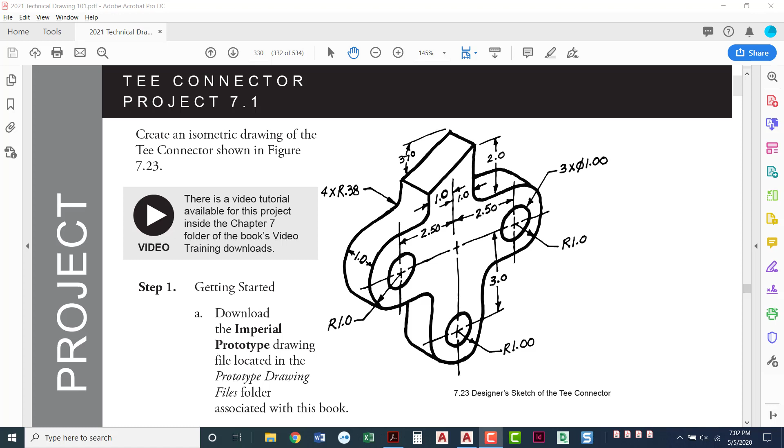In this video, I'm going to show you how to do the T-connector. This is Chapter 7, Project 7.1, where we're learning how to do isometric drawings. I've pulled up the picture from your book. As you can see, the T-connector is shaped like a T, so we'll start off with that T shape. We have a lot of dimensions here, and we'll slowly build this up using isometric drawing.

So things to remember as we're doing isometrics: when we put ourselves into isometric mode, it's important that we leave our ortho on. Ortho is F8 on your keyboard, so we can be sure we're drawing at 30-degree and 90-degree angles. We'll use the ellipse command, but instead of just the ellipse, we'll use the iso circle option, so remember to set it in the ellipse command. Certain commands don't work in isometric - fillet doesn't work the way it should, offset doesn't work the way it should, and chamfer doesn't work the way it should. So those are three commands we can't use in isometric, and I'll show you how to work around that.

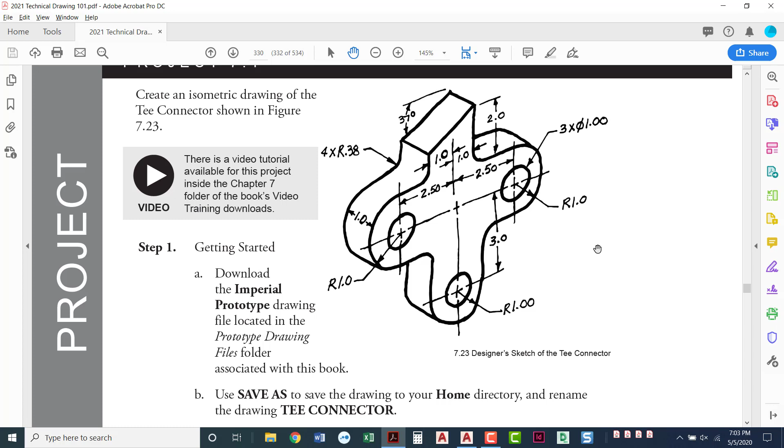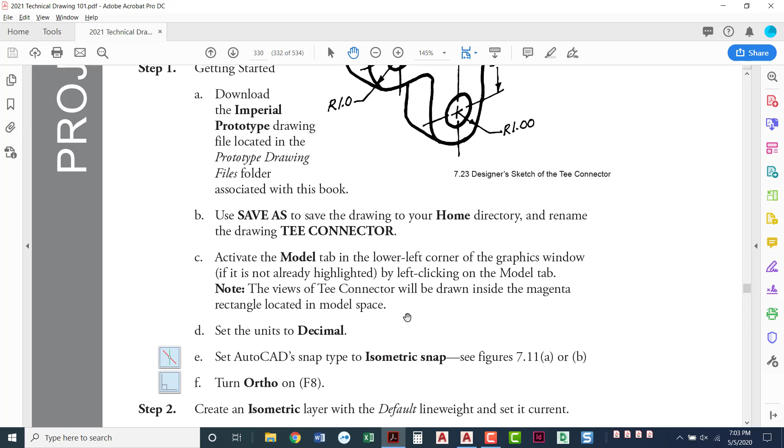So getting started, we're going to open up the Imperial prototype file. I've already got that one open. We're going to save it into our home directory as the T connector. I'll come over here to the drawing file and say Save As. We'll put it on the desktop and call it the T connector.

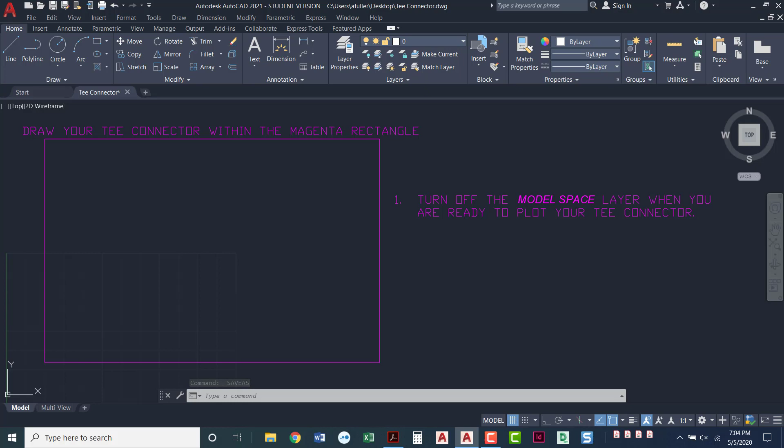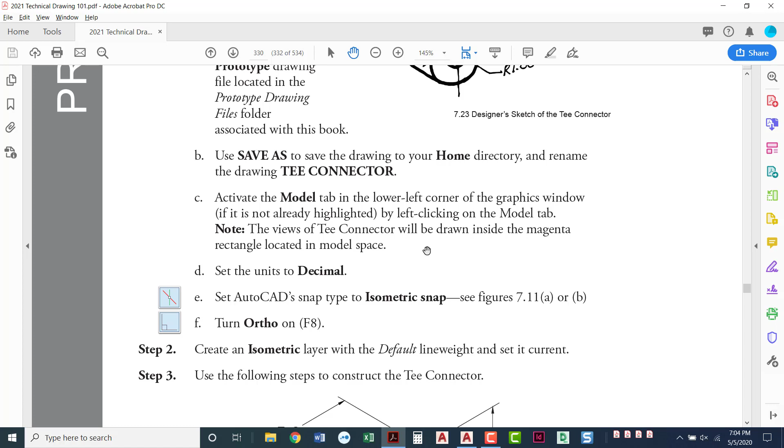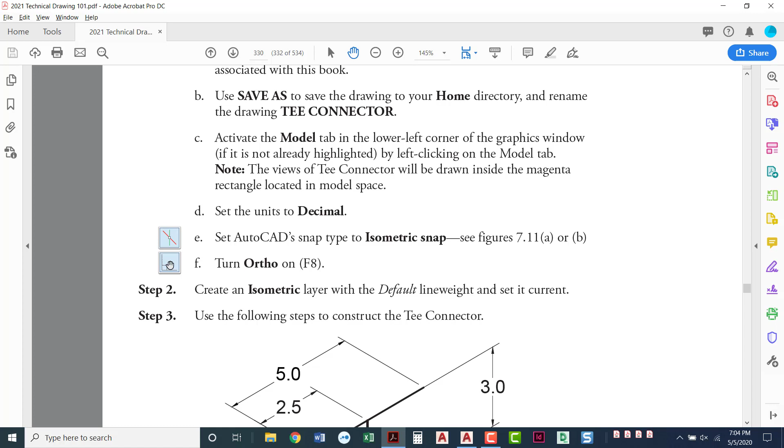So draw the T connector within the magenta rectangle. We'll come back here and look at what our other steps are. Activate the model tab - the model tab is where that black space is, our drawing space, the graphics window. We're going to set the units to decimal, and then set AutoCAD's snap type to isometric snap - there's a picture of an icon for that. We're going to turn on our ortho, here's a picture of that, that's F8, and we're going to get started creating the isometric.

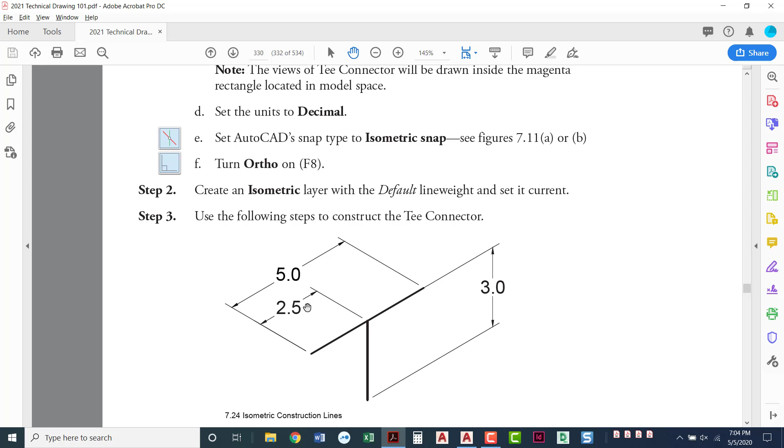I'll keep flipping back and forth to this book so you can see the steps we need to do. So we'll go in and set the units to decimal, turn on our isometric snap, turn on our ortho, and then get started. I'm going to draw that T shape - the overall shape has a length of 5 horizontally, and vertically it has a length of 3. So I'll come back into AutoCAD and we'll get started.

When you're doing isometrics, I like to turn that grid off because the minute we put ourselves into an isometric view, that grid is going to get a little wonky. I'll leave it on just to show you what happens. To put ourselves in the isometric view, the easiest way - and this showed up a few releases ago - we have an option down here to put ourselves into an isometric view. When we do that, it's important to note, look at my crosshair right now.

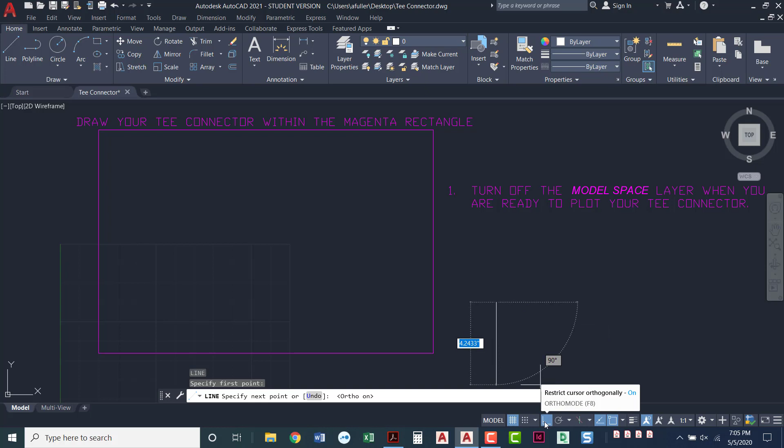So when I draw a line and turn on my ortho - I'll hit F8, or you could hit this button right here - it locks you into horizontal and vertical lines. You can't even make an angled line if you tried, unless you typed in a specific angle. Just using direct entry, I cannot get an angled line. So it's easy to think of ortho as locking you into just horizontal and vertical lines, but actually what ortho is doing is locking you into what your crosshair looks like.

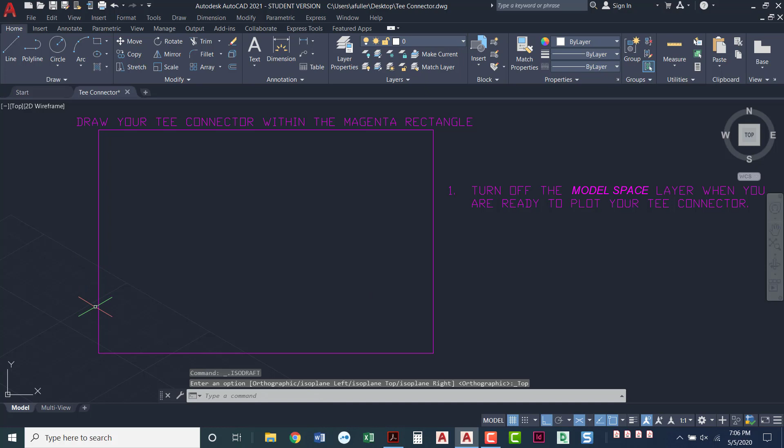So in doing this, we're going to change our crosshair to isometric. Right now it doesn't matter which one of these you choose, we're just going to click one. Now look, there's where I was saying my grid was going to get crazy - it went at an angle, so I'm just going to turn that grid off. It's not very useful when you're in isometric mode. But now that I've got my crosshair looking this way and I draw a line, I'm locked into these two angles that I see. I cannot make a vertical line even if I tried.

If I hit F5, that toggles between the different isometric cursors that I have. I cannot make a line going up at that 150 degrees. If I hit F5 one more time, now I can go vertically this way, but I can't make a line over here at 30 degrees. So that F5 you can use in the middle of a command - you can always hit F5 and just toggle between the different isometric views. There are 3 different ones, so you've got it this way, and this way.

So maybe it's easier to see it there. So F5.

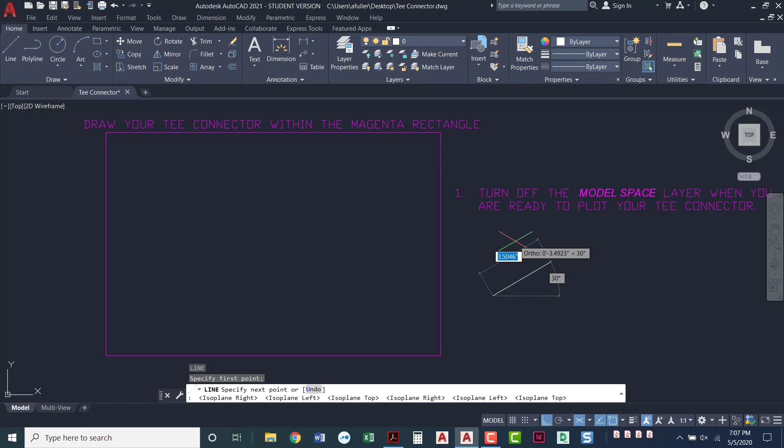F5, and F5, and you can just keep toggling between those three. So now that we know about this, we're going to go ahead and start our drawing. I'm going to draw a line, clicking somewhere in the middle. We don't have a specific start point for this one, but we'll click somewhere in the middle, and we're going to draw it out a distance of 5.

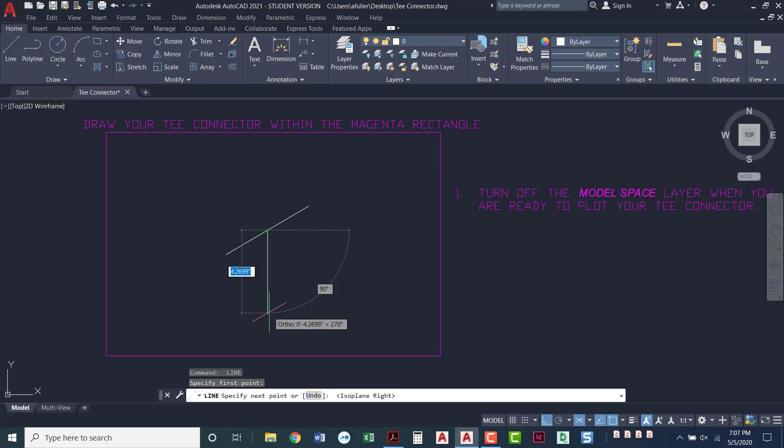We're going to draw another line, taking it from the midpoint, and we need to bring it straight down. I'm going to hit F5 again, pull my line down, and it tells me my distance is 3. So press enter—I've got the T for my tee connector. All right, let's go back in here and see we've got this drawn.

Scroll down, and now we need to do our ISO circles. And those ISO circles, they're a little bit tricky—you have to remember how to draw them.

It's going to ask you, potentially could ask you for a radius—it probably is going to ask us for a radius, and we're going to have to tell it needs to be a diameter. So we need to make sure we have one of them that's a 1-inch diameter. The second one has a 2-inch diameter. They're concentric, which means they share the same center point.

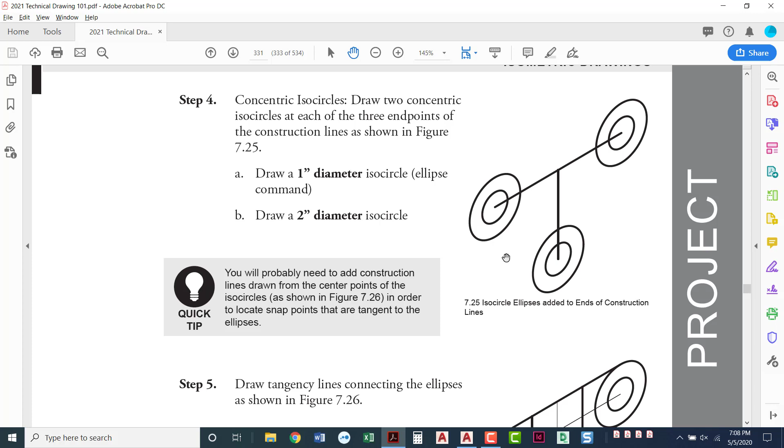So we're going to do them at the endpoints of all of those lines, those 3 lines of the T. So the 3 endpoints that we have: 1-inch diameter, 2-inch diameter. Let's come back to the drawing.

We're going to do our ellipse command, and actually for that ellipse, we're going to pull this down. Instead of doing the center option, we're going to choose the axis end option. It won't work with the center option.

But if you look down here at the command line, we now have an option for ISO circle. So you can type in I for ISO circle. You can move down here and click on the word ISO circle, or you can do your down arrow and keep toggling till you see ISO circle and press enter.

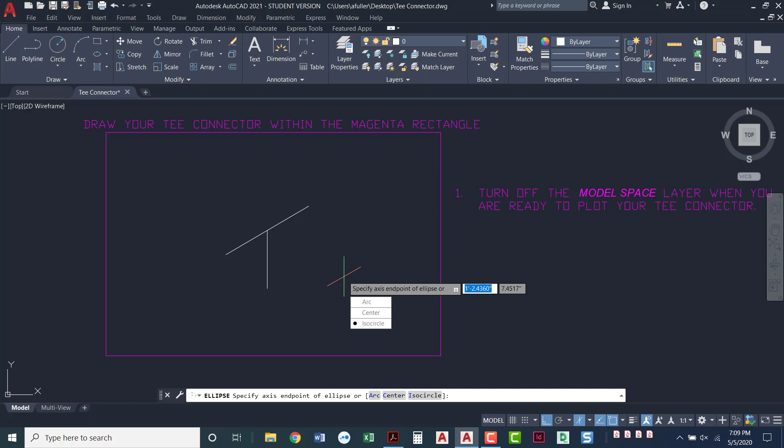Typically, I just do the I, enter. It's the easiest way to do it, I think. So we're going to do an ISO circle.

And you'll know that you did it correctly when you click here to start, and it kind of functions like the circle command instead of the arc command or ellipse command.

So we're going to do that ISO circle, and watch—I just want to show you when I press F5 right now, that will toggle between ISO top, ISO right, and ISO left. So you're going to figure out which one looks the best. It's ISO right that we're going for.

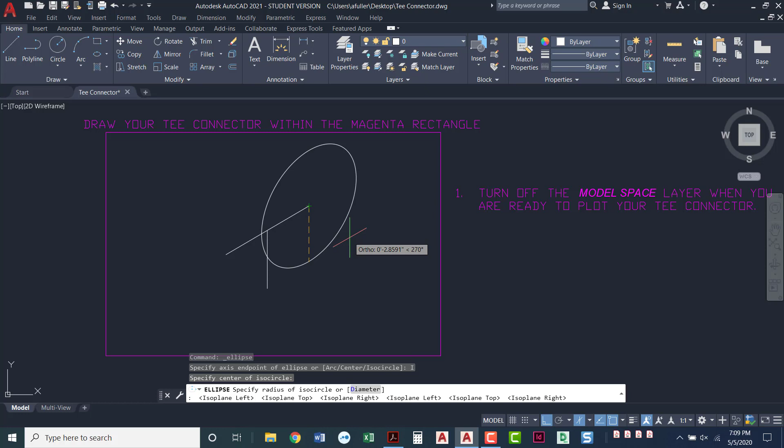So now I've got this. But this is where, look down at the command line, it's telling me to give it a radius of the ISO circle. But if you remember, we were not given the radius, we were given the diameter. So it's important to remember right here, we're going to have to press D for diameter, press enter, and now it's prompting me for the diameter.

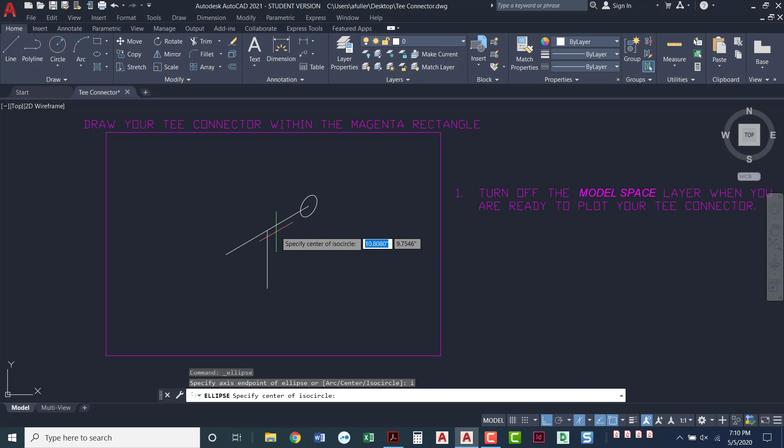So the first one, I'm going to type in a diameter of 1. Press enter after you've typed in your diameter. I'm going to start that command again—I need to tell it to be an ISO circle, so I for ISO circle, enter. I'm going to click on that same endpoint.

It's asking me for a radius again, so I need to force it to be a diameter—D, enter. And this one's going to have a diameter of 2. If you accidentally just typed 1 and 2 without forcing it to ask you for a diameter, you have just made your circles 2 times too big. So look at your drawing and make sure that you don't have giant circles.

Yours should look like mine.

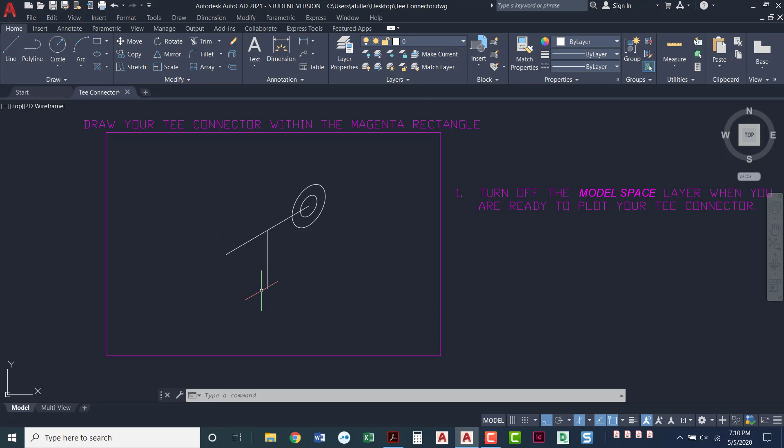Now what we're going to do is we could continue and just draw 2 ISO circles here, but since they're all the same size, let's just go ahead and do the copy command. It's always better to use the tools that we've got. I'll copy it from the endpoint to this endpoint to this endpoint. The endpoint that I originally picked it up at is also the center of those 2 circles, so the center should already be at the endpoint. It really doesn't matter which base point you pick, the center of the circles or the endpoint of the line - either way, it's the same place, but you're going to snap to endpoint and endpoint to get your lines looking the way you need them.

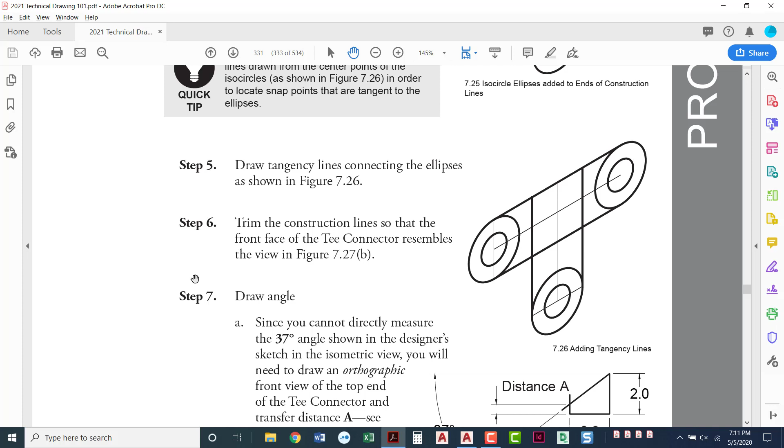All right, so we've done step 4. We're going to come down here to step number 5. We're going to actually draw these lines out to figure out how to get this done. So I'm going to come over here.

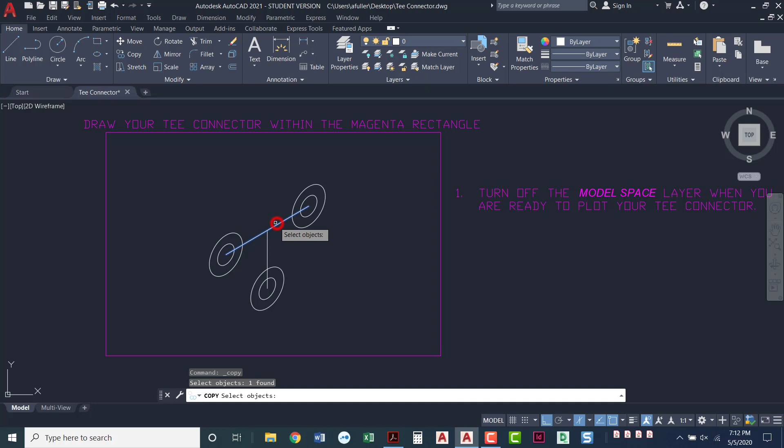Normally this would be a great time to use the offset command, but offset won't work for us. So the way that I do this is I do the copy command. You can copy and just pull it in the direction you want to go, and type in your distance. So copy, select this, press enter, select the base point, and pull it - make sure your ortho is on. You have to have your ortho on when you're doing isometrics.

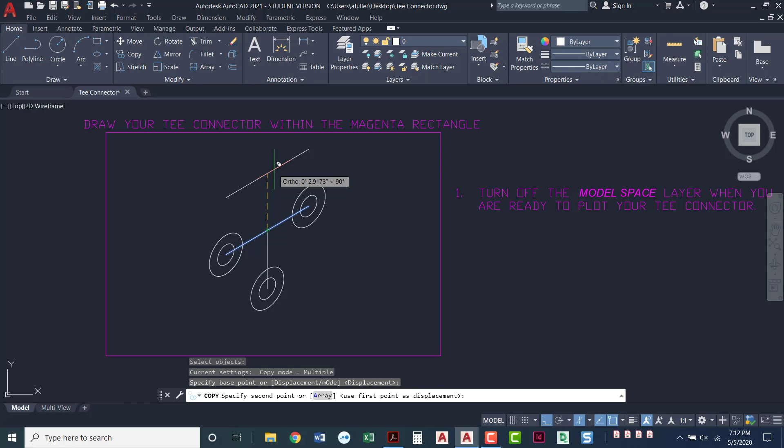If our biggest diameter was a diameter of 2, that means it has a radius of 1, so to get from the center to the very top is going to be a distance of 1. I'm going to pull it up. I like to over-exaggerate how far I pull it up, that way it doesn't get overridden by O-snap. Sometimes that happens and it'll snap back to something I didn't want. So I always exaggerate how far I pull it up just to make sure no O-snaps are going to catch me. I'm going to pull it up and type in a distance of 1.

I'm going to pull it down, and again over-exaggerating, I don't want any of these O-snaps to get me, so I'll pull it down, over-exaggerate how far, and type in your distance of 1. You're not clicking anywhere, I'm just typing my distance. Press Enter, then press Enter one more time to end that command, and I've just copied this line up and down so it's tangent to those points.

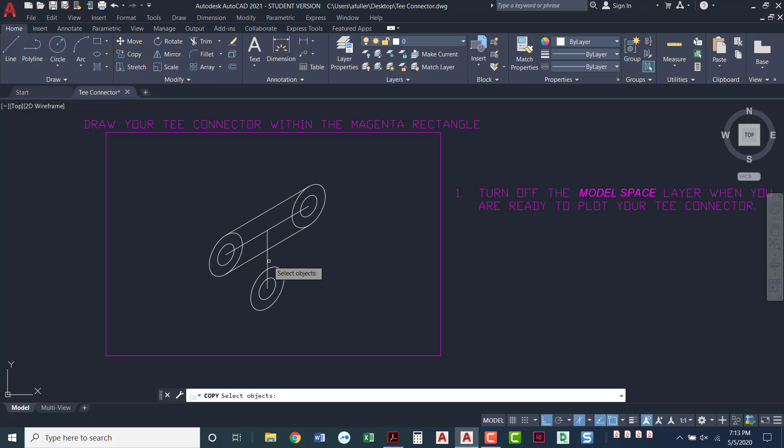I'm going to do one more copy command. I'll take this line, select it, press Enter, select a base point, and again I'm going to exaggerate how far I go out, a distance of 1, press Enter to end the command. Now I have that T in the middle, which was just a guide to get me to the center of those circles and help me get the copies to get the edges, so I'm going to erase that T.

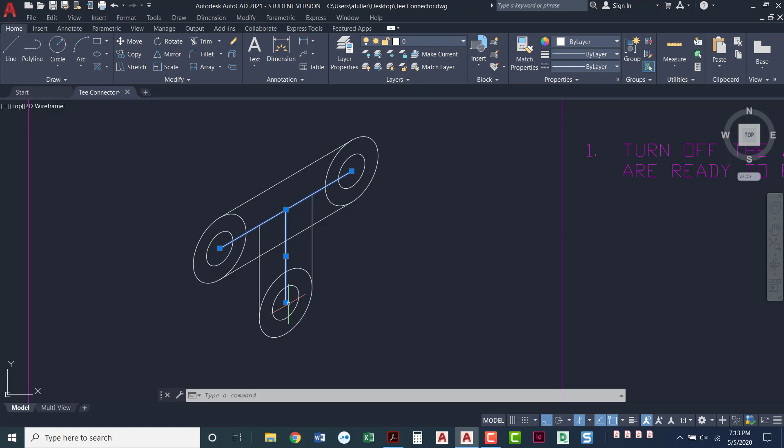I'm going to use my extend command - extend is kind of buried in with that trim. I'll press Enter so it extends to the next thing that it sees, and just click here, click here, and it extends right up. Now I've got this shape.

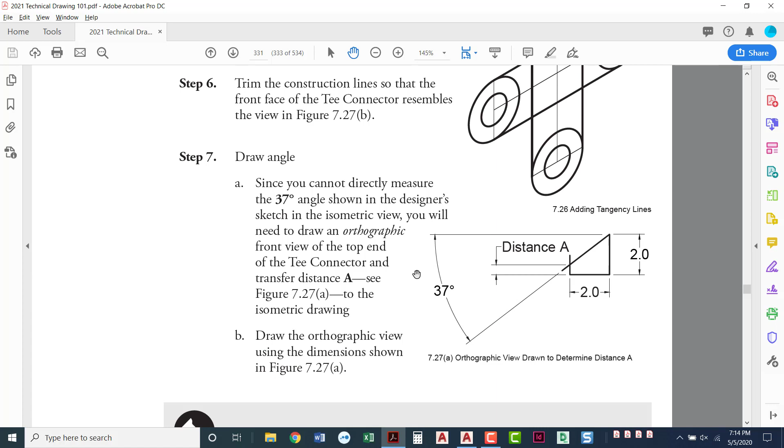Now what I need to do - this is the tricky part. I've got this guy right here, and the tricky part is now I've got this angle at the top. But we can't draw angles when we are in isometric, because with isometric we're already at an angle. So drawing 37 degrees when we're already at 30 degrees is going to make it all wonky. So what we're going to have to do is take this distance - we know this is 2 over, we know this is 2 up, we know it's 37 degrees down, so you could do some math and know that this is 180 degrees plus 37 degrees.

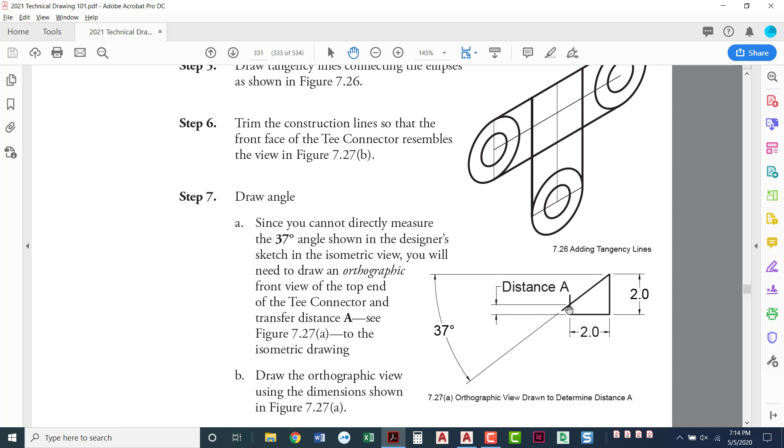So that would be 180 would be 190, 200, 210, 217 would be the angle here. Or we can just go up and over, and then we'll figure out how to draw that line. What we're trying to get is this line, this distance right here, this tiny little guy right here. And so we're going to go back into AutoCAD.

I need to do this, but I can't do it in isometric, so I'm going to have to put myself back into my regular cursor, which would be rectangular snap. I'm going to click on that button to turn it off, and now I'm out of isometric mode and back into my rectangular snap. I'm going to draw a line off to the side over here. We're going to go over a distance of 2, up a distance of 2. We can come down, and if we know what that distance is, we can come down that distance. I'm going to turn off my ortho, press F8.

So if I come down this way, I can take my 180 plus my 37 degrees, which would be 217. I'm going to make sure when I'm doing this, that when you draw angles in AutoCAD, it looks at kind of where you're starting from, and it imagines there's a horizon here. So if you want your angle to go up, you're going to go up. If you want your angle to go down, you're going to go down. It's a little bit tricky, but actually, if I'm going to say 217, I'm actually going to keep it up here.

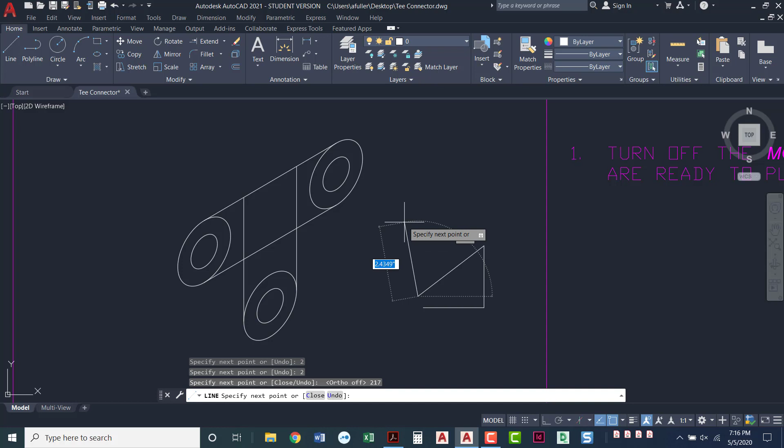To make my angle go all the way from 0 down to 217, any length of line will work. I'm just going to press Tab and type 217. And it just went down 217. If I had started down here, it would have done 217 from 0 and gone back up this way, counterclockwise.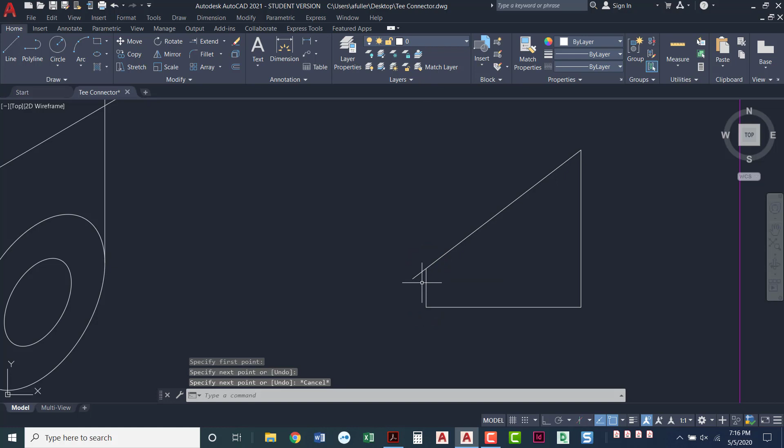Oh, I'm sorry, clockwise. So now that we have this angle, I'm going to come in here and draw a line. I have no idea what length that line is. I'm going to trim right there. And so this is how I would have drawn this if I were drawing just the front view of this Tee connector. What I'm actually going to do now, it's a little bit tricky, but it's cool.

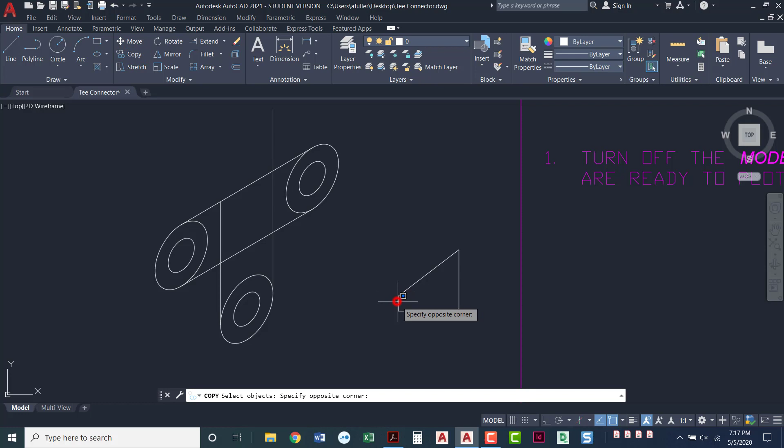Watch. I'm going to copy this to here because I know that's a length of 2. I'm going to copy this, whatever length that is, I don't even know, to here. Now I'm just going to draw a line, connect the dots, from endpoint to endpoint.

Do you see how skewed that is? This is what I was talking about. You can't draw an angle when you're in isometric because you're already at an angle. So the whole thing is kind of skewed.

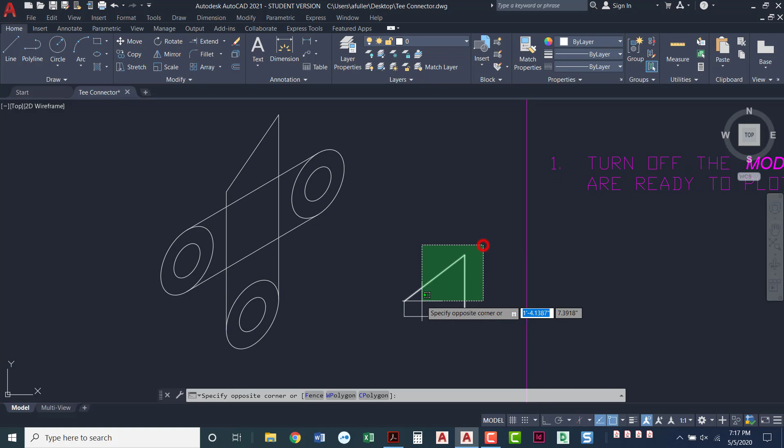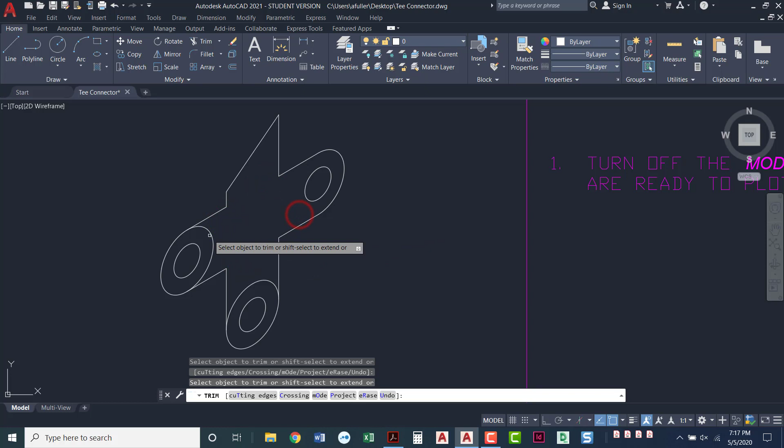Now that we have that, we don't need this guy anymore. I'm going to go over here and now trim. Using the trim command, it's buried in my extend. So trim, I'm going to press enter. I'm going to trim out all of these lines, trim the insides of these arcs as well. That looks amazing. Look at that. Looking good, looking good. All right.

So I'm done with this guy. The next step, oh, it just showed me, that's step 8, we did that. The next step is, I've got the guy looking like this, trim out any lines, we did. The next step is, I need to get fillets in here, but remember the fillet command does not work when I'm using isometric. So what I'm going to have to do is use the copy command.

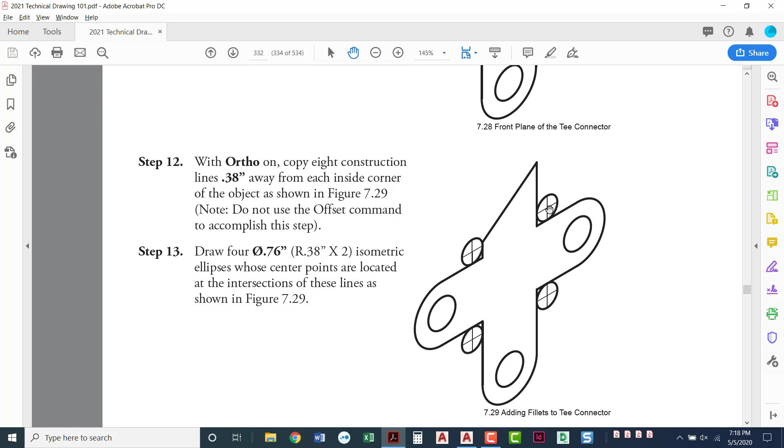I'm going to take this line, copy it over. We have a radius of 0.38, so that means to get to the center of that arc, I'm going to copy over 0.38 and down and up 0.38. I'm going to copy all of these lines over 0.38, and then I'm going to have to draw iso circles.

So I'm going to do the copy command. May as well just pick up these 2 lines while we're at it. Pressed enter when I was done. Oops, you know what I have not done? I have not put myself back into an isometric mode. I'm going to click that button, and I'm also going to click the button to put myself into ortho.

Got to make sure you've got ortho on and your isometric on. So now I can do it. Copy, click those 2, press enter. Select a base point. It doesn't matter where your base point is. I'm not even going to be on the line. I'll just touch out in here in space. Remember I talked about exaggerating how far you bring it out just so O-snaps don't get you.

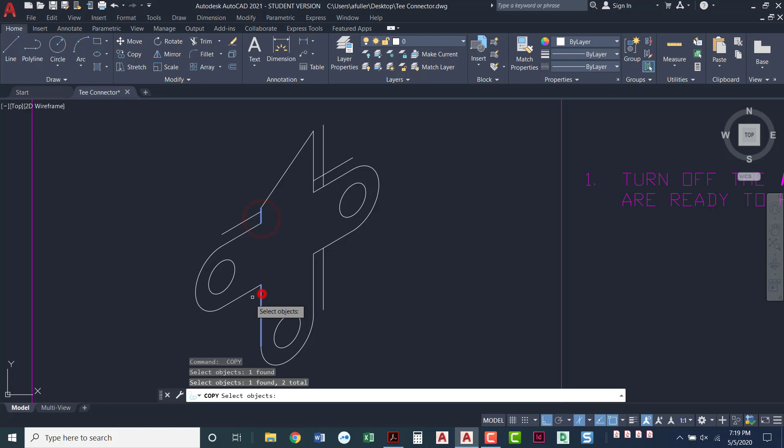I'm going to type in 0.38. Press enter to end that command. I'm going to select these 2 lines, just saving myself some time so I don't have to do it so many times. But 0.38, I'm going to copy this line here and here. Press enter. Anywhere for a base point, slide it out, 0.38.

Cannot stress how important it is that you have your ortho on right now. I know I keep saying it. Come down, 0.38. All right, that looks good. Now we have the centers for where those iso circles are going to go.

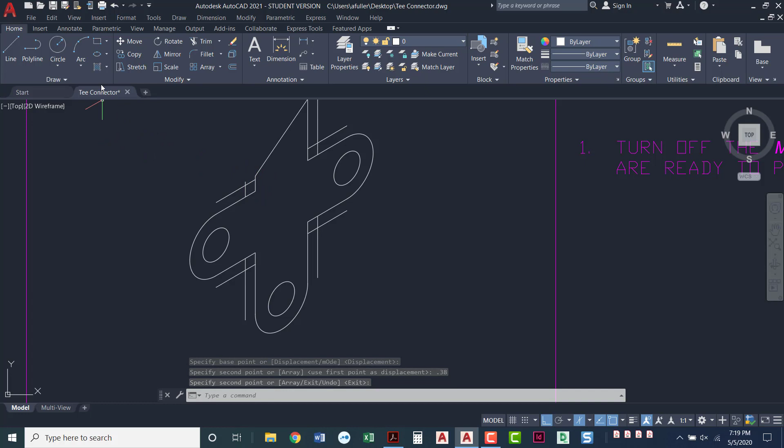So I'll come into here. I'm going to do an iso circle. Remember, I press enter for iso circle. Let's zoom into one of these. And you can either, if you know you did it right, snap to that endpoint, or you can type in 0.38. Oops, 0.38. And I've got my iso circle.

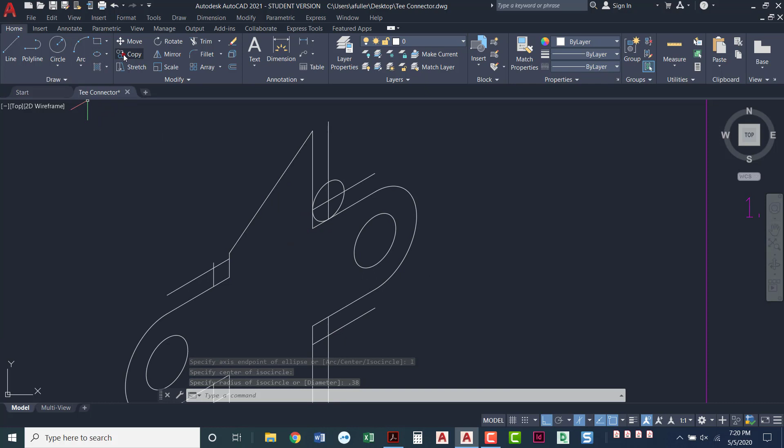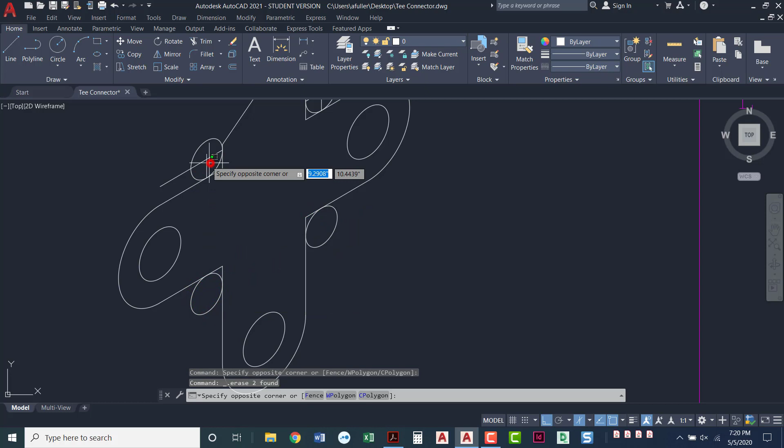Looking good. Now, just because I don't want to have to keep repeating myself, I'm just going to say copy, select the object, press enter, click here. And you got to make sure you're clicking to the intersection where those 2 lines are crossing each other. All right, now I can go erase these out, those were just construction lines to get me to the center. Over here.

Very good. Now I'm going to do my trim command. Press enter when you do the trim command. Select all of this.

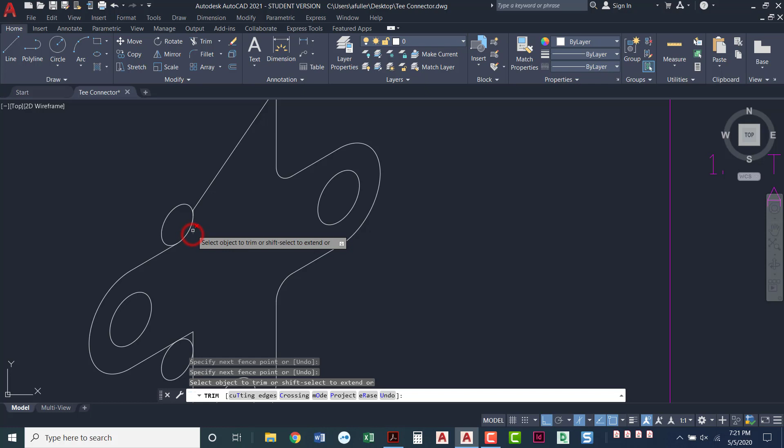All right, looks good. So I've got the whole front surface of this, the front face of my T-connector with the fillets, with the angle, with the iso circles. Let's come back over here and look.

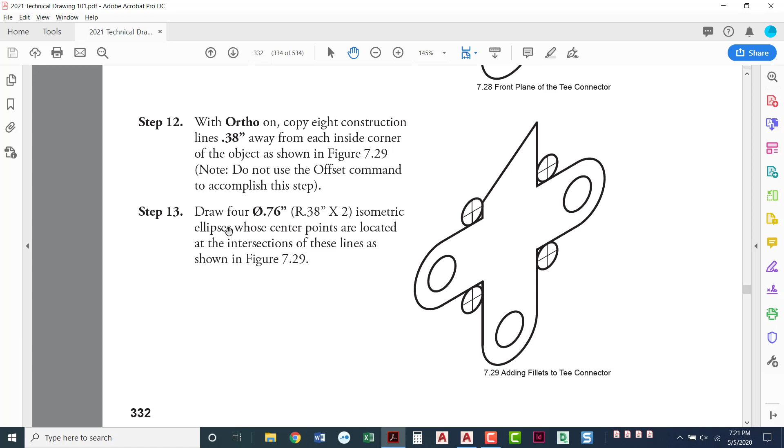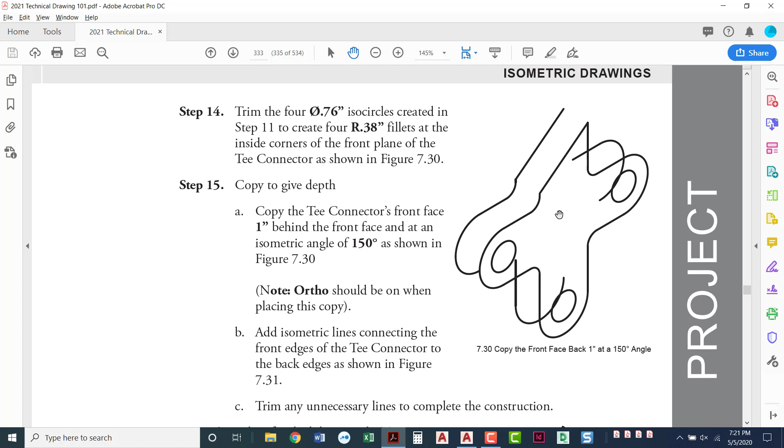We did this. Now what we're going to do is copy this back, so it has a depth of 1. We're going to copy all of the important lines back. You don't have to copy the entire thing because you're going to end up erasing and trimming a whole lot, so we'll just go with the picture shown here to give us which lines we're going to copy back. You're welcome to look in the book and see what this looks like.

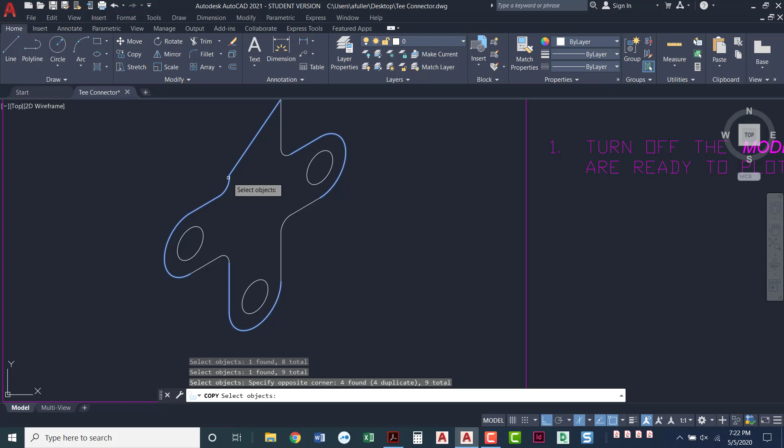I'm going to use my copy command. I definitely need this. I definitely need that. I'm going to need this. I am going to need this guy and this guy, right here and right here. And I think that's it. Yeah, make sure that you get that little arc right here. There's like a little guy right there. You got to make sure you get him.

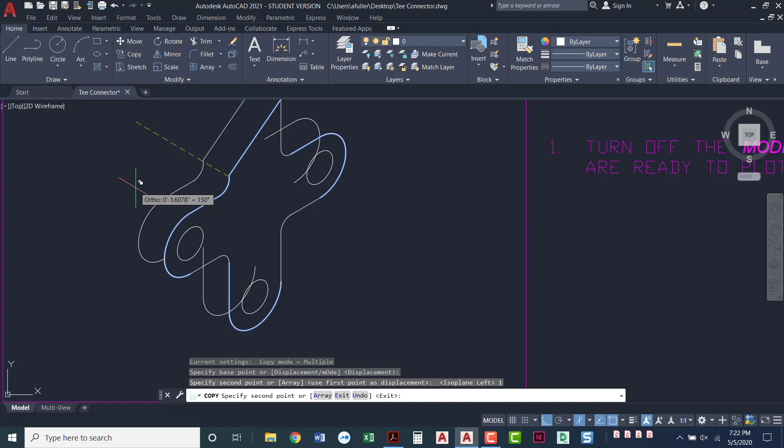So I'll press enter and do the copy command, but I need to go back up and to the left, so I'm going to hit F5 to allow me to go that direction. And I'm just going to type in a distance, so my distance is 1. Press enter after you press 1, and then press enter again to end that command.

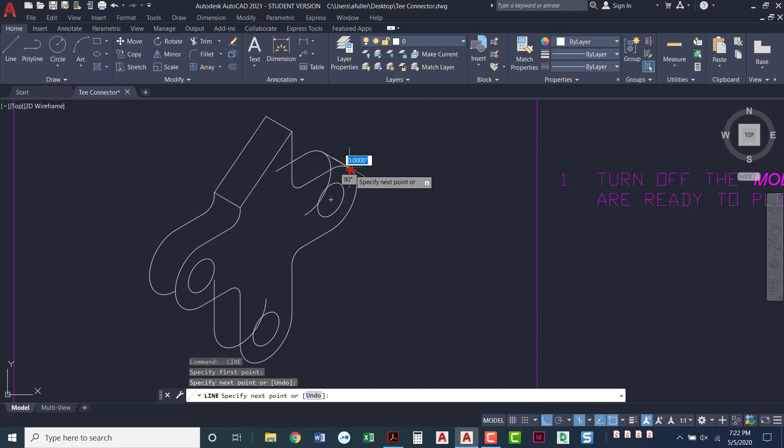Now what I'm going to do is just close it off and connect all the dots, so a line from endpoint to endpoint, endpoint to endpoint. We actually need to turn on our quadrant OSnap, quadrant to quadrant, quadrant to quadrant. Now all I got to do is come in here and just trim this thing up.

So trim, press enter. I don't need this line. I don't need this line. I don't need this line. I don't need this line, and I don't need this line. Notice how there's a little piece hanging right here. I don't need this line either.

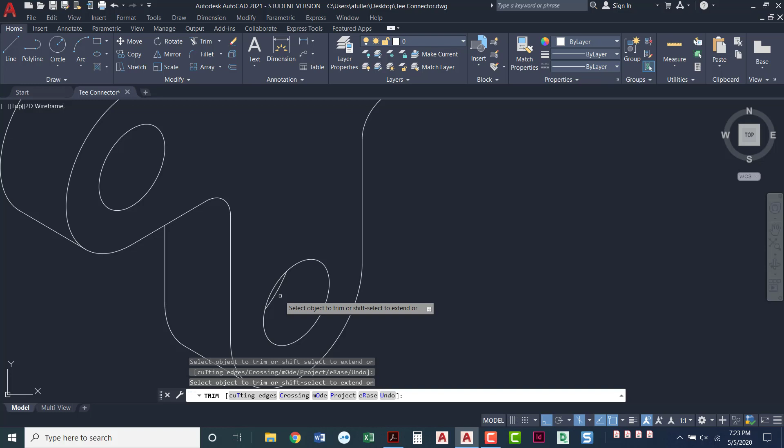If you are using an older version of AutoCAD, you'll have to stop and erase this line. If you are using AutoCAD 2021, this is like the coolest thing that came out with AutoCAD 2021 - now it will let me, in the middle of the trim command, just erase that line. Honestly, it's my favorite feature that came out with 2021. So I'll click here, click here, click here, click there, click there, press enter when I'm done, and that is my Tee connector. It looks great.

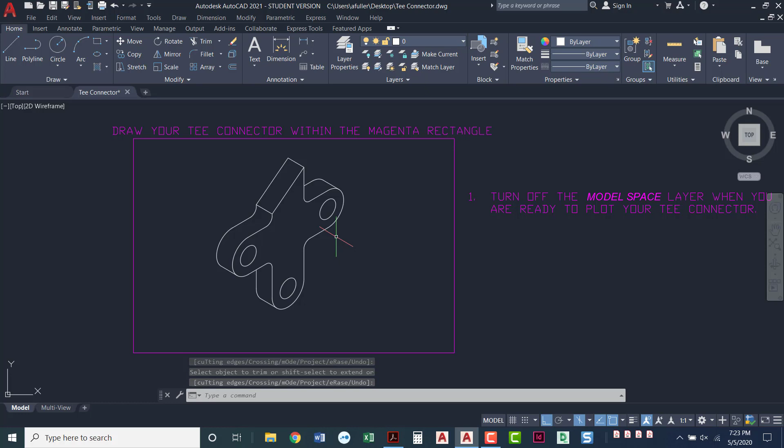So what you need to do after this is come over here, click on multi-view. You're going to fill out the title block. If you look in, I'm going to double click into my viewport. Look and see, my scale is 1 to 2, so when you're filling out the scale, you need to say 1 to 2. Another thing to take note of is the font.

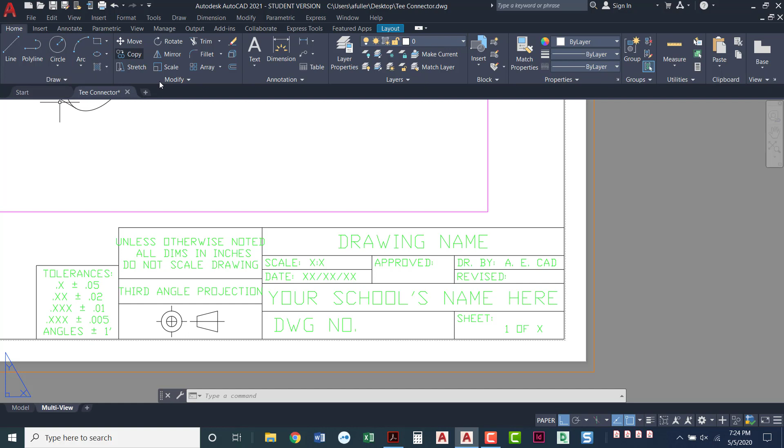It is not a very nice looking font, so what you're going to need to do is come over here - there's several ways that you can get to it. You can pull down annotation and get to your text style here. What we're going to do is change it to Arial. If you just start typing ARI, it just jumps right to it. So we're going to apply and close, and now that font looks a lot better.

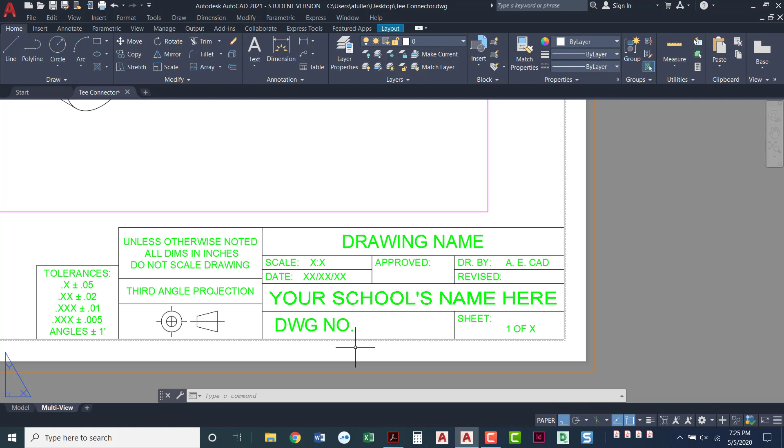So on all of our projects, anything mechanical, you're going to make sure that you've set your drawing to the Arial font. The only other font that we use in this class is the Stylus BT font for the architectural projects, so when in doubt, if it's architectural, it's Stylus BT. If it is mechanical, you're going to use Arial, and it needs to be updated. So you see a big difference here.

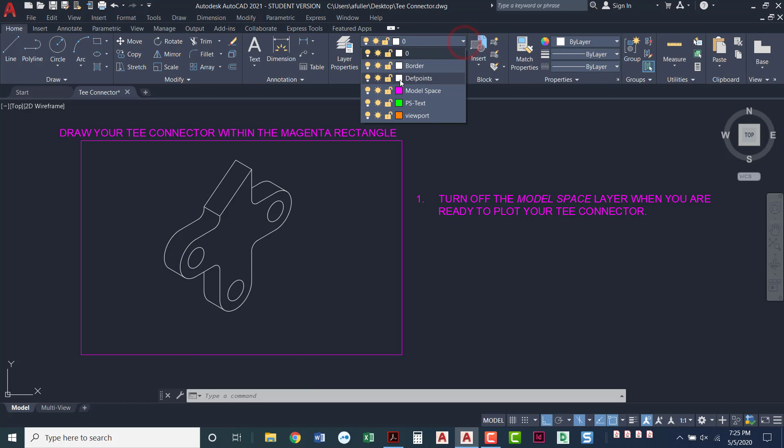So you'll go ahead and just double click on all of these to fill out the scale, fill out all of this information. And also, when you're done with this, it did say turn off the model space layer when you're ready to plot the Tee connector - we don't want to see that magenta rectangle. So we'll come up here and turn off the model space, that way when we come over here, it looks nice and clean. So perfect, you've just made the Tee connector.